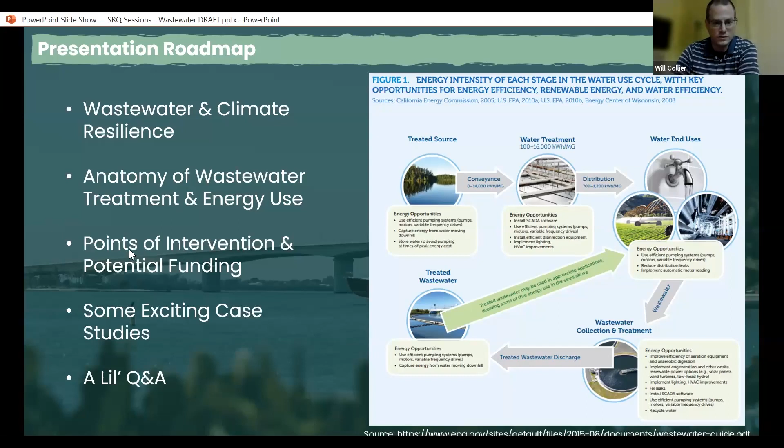more broadly, especially in the Gulf Coast region of Florida, where the intersection of the coast, seawater infiltration and wastewater treatment facilities and extreme weather events all come together and coalesce in ways that are extremely important for climate resiliency in communities. Let's start with the big picture.

So wastewater energy use, very broadly speaking, consumes a lot of energy. At a national level, it's approximately 3 to 4% of all electricity use in the United States. And at a municipal level, that can range anywhere from 10 to 40%, depending on the characteristics of a given municipality, the wastewater treatment plants, et cetera. So considerable energy use goes into treating water.

It's an area where municipalities have significant opportunity to reduce energy costs and energy burdens, perhaps making it a different term than we use in the residential setting, but thinking about the ways that energy costs and energy efficiency can help wastewater treatment plants to reduce overall costs for municipalities and make them more resilient in the process. So there's a lot of both direct and indirect benefits that would come from doing so, as we see here in a recent EPA report talking about energy efficiency and wastewater treatment.

I won't list them all here, as you can see, but economic development tied to workforce development that can go into training needed for new equipment, new infrastructure, new operation and processes of wastewater treatment plants, I think is a big and important part of this.

As we've talked about previously, and as we see with a lot of federal funding coming down, both through the Inflation Reduction Act and the Infrastructure Investment and Jobs Act, we see opportunities to add workforce development and training as a component to many of the sector-specific grants that are coming out of the federal government to ensure that those monies can actually be implemented by having the workforce available to do so. In addition, lots of other benefits, of course, reduction of greenhouse gas emissions, public health amongst them.

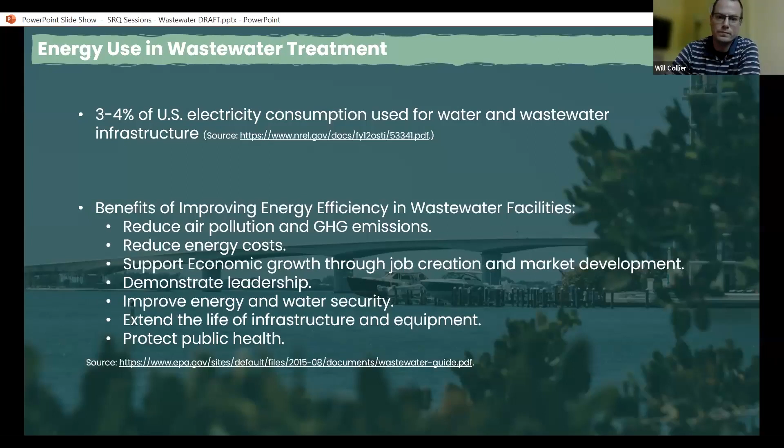Since I've been spending a lot of time recently working with coalitions and networks that talk about the sustainable development goals and try to think about a common language through which we can discuss and talk about local climate resiliency, I've put in here the United Nations Sustainable Development Goals that I think most directly relate to some of the things we're talking about today, this intersection of wastewater, energy, and infrastructure development.

There's at least 6 sustainable development goals that are entangled in these processes, be they focusing on upgrading industry and infrastructure in communities and cities for climate resilience, be it related to efficiency in water and energy use for clean water and sanitation, and the impacts that has on overall energy use of a given municipality or state or country. Then, of course, the economic opportunities that go along with that. So excited to think about this in terms of that framework and what projects and sources of funding might hit different pieces of these goals, but also collectively, sort of integratively address quite a few of them.

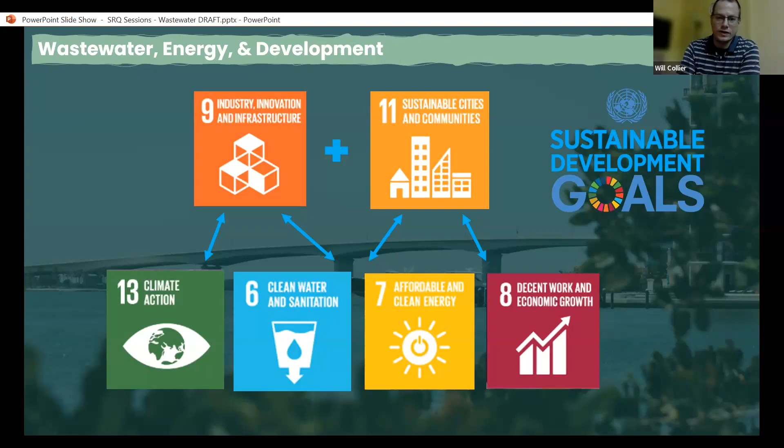To provide a little bit of wastewater context here, especially in the state of Florida, I just wanted to point out a few things, neat little GIF here of some recent wastewater spill hotspots that have happened. And you can obviously see the Gulf Coast has been seeing considerable wastewater spills along Florida and will continue to do so, especially if you look at the 2 graphs on the right. You can see impacted Florida waterways by wastewater spills. On the bottom right, you see projected population growth for the top 20 Florida counties.

And you can see that there's not a single one of those counties that is expected to have a reduction in population growth. And so energy use in the wastewater sector is anticipated to increase some 20% with these changes to population growth, with increased water demand, and with increased needs for water quality. So this is an opportune moment to potentially take available federal climate funding and other sources of funding focused on climate and energy, apply them to the sector that can have huge payoffs, especially for municipal administrations.

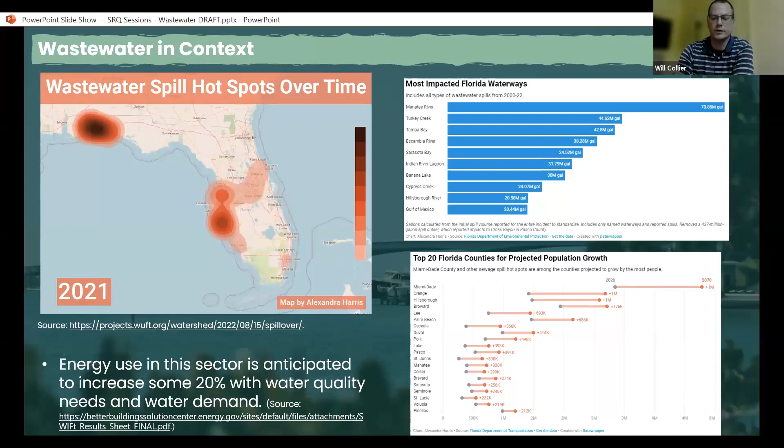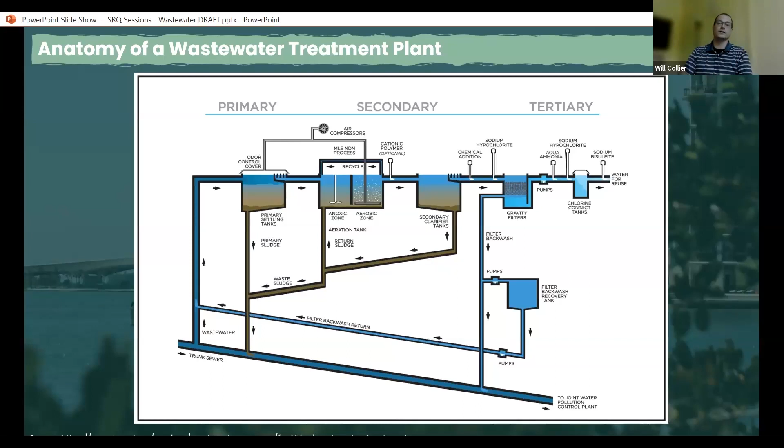So next, let's dive into the anatomy of a wastewater treatment facility to better understand where energy use occurs along these processes, where there might be important points of intervention, where we might match funding to those bottlenecks or points of intervention. This is a really great graphic we were able to take from Los Angeles County's wastewater treatment division, and it does a great job of sort of, in general terms, summarizing the different components of a wastewater treatment facility. What you really need to take away are these 3 primary areas or components of this process where different operations occur and different energy uses associated with these processes.

So you can broadly think of them, for those of you that don't have a ton of exposure to wastewater treatment. This website does an excellent job of trying to relate the processes that you see along this chain within a wastewater treatment facility to the natural processes that they are in some way, shape, or form trying to mimic in order to treat wastewater. So at the beginning of these systems, in the primary treatment phase, you have these really long concrete channels and holding tanks, places where solid materials can precipitate out.

In the secondary treatment phase, you have these aeration tanks where they're churning them. What's the word I'm looking for? Putting bubbles into them, creating aerations to promote environments for bacterial growth and for the breakdown of biosolids. And then finally, there's a tertiary stage where you move into using either chemical or organic processes to deal with suspended materials still in the water. At this point, you can also use UV light or other chemicals as a way to treat the water as well. And so I'll let you read these in more detail after we share our presentation.

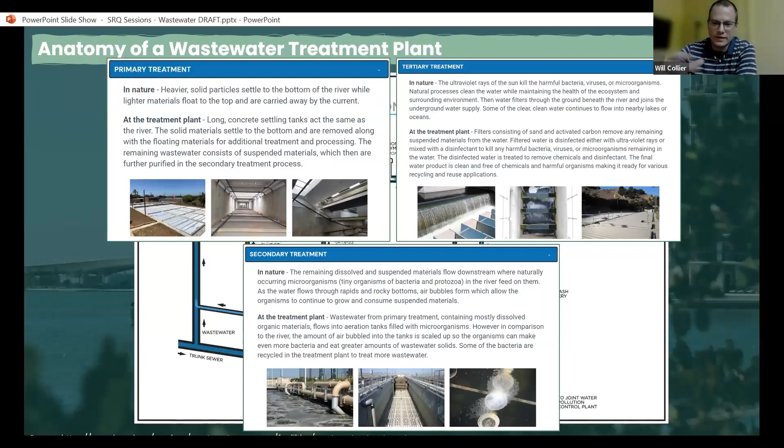So we'll let you explore that later, but it's neat to think about how wastewater treatment plants in very real ways are mimicking natural processes. Here's a big picture, bird's eye view of a wastewater treatment facility, just to give you an idea of some of the scale of these facilities and where these processes are playing out across a landscape. This is a really unique case study that we'll come back to in a little bit, but you can see that these primary, secondary, and tertiary processes are occurring across the footprint of this wastewater treatment facility that has implications for resiliency, for pollution, and for energy efficiency.

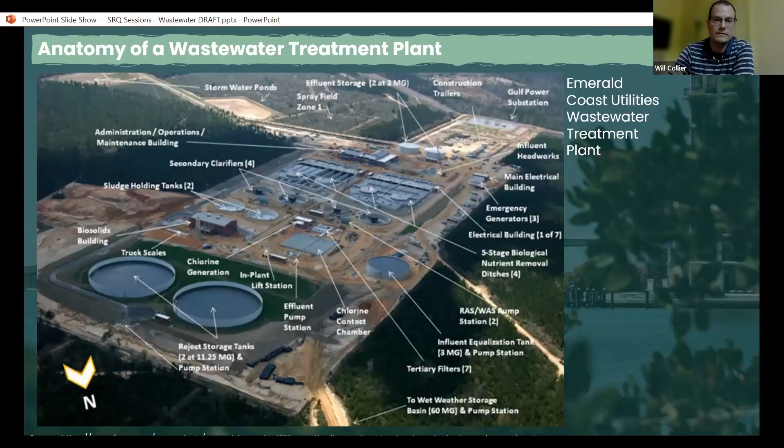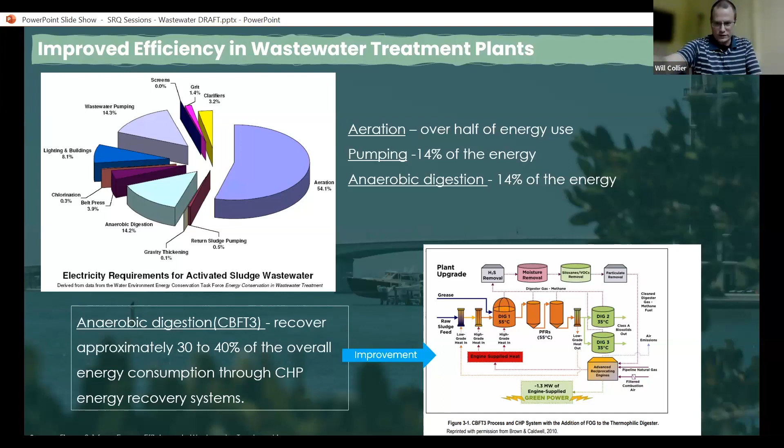So this example here on the bottom right, you can see this is a very specific type of anaerobic digester that is designed to recover energy through the anaerobic digestion process and use that energy in further wastewater treatment processes in order to reduce total energy loss and use.

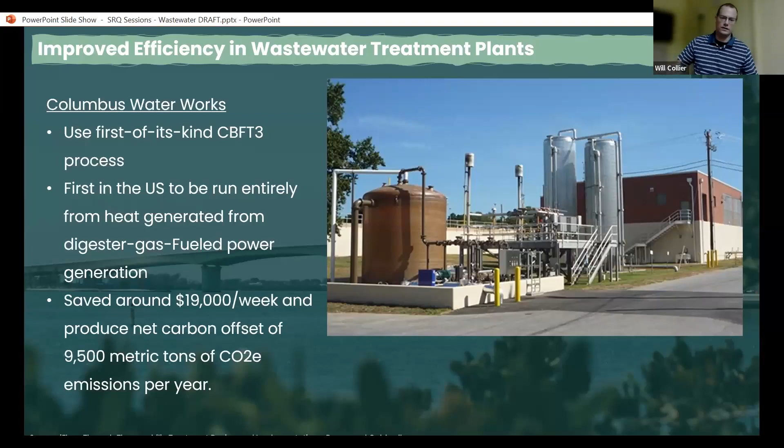And so in this Columbus Water Works example, they installed a first of its kind anaerobic digester to do this, and they were able to save around 19 grand a week and produce more than 9,500 metric tons of CO2 offsets per year.

One of the funding sources that we've seen across a variety of case studies in order to do any sort of upgrades to wastewater treatment facilities, be they retrofits, relocations, et cetera, has to deal with state revolving loan funds. And so IIJA is adding an additional 11.7 billion to state revolving loan funds.

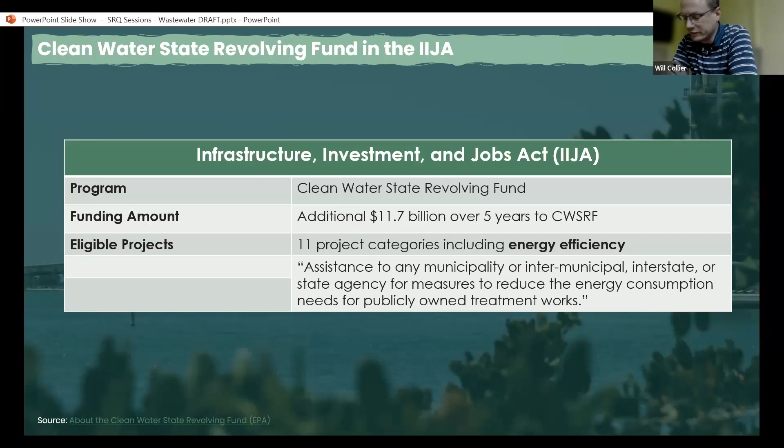And we'll see that these become a key piece of funding that, to use a popular term I've heard a lot with the IRA and IIJA, is you can braid funding from a variety of sources or stack funding together in order to make it go further, match different sources of funding. And so these clean water state revolving funds that have just been increased via IIJA will be really important parts of those processes.

Here's a really neat resource that I would definitely recommend folks check out, that they're doing some fabulous work and it's work in progress. So things are underway and it seems like a really exciting project. This is through the Department of Energy, Better Buildings, and it's a Sustainable Wastewater Infrastructure of the Future Accelerator Program, or SWIFT program. And it's engaged over 70 facilities, developed tools and resources for these facilities. You can find these online.

So if you go to the DOE SWIFT website, a plethora of information is available for municipalities or private wastewater treatment facility operators, from energy data management and analysis, monitoring, measurement, evaluation, financing options, et cetera. This SWIFT toolkit that they're continuing to build and are doing so through these pilot engagements has been especially successful and a spectacular resource. And they plan to continue to broaden these tools. It's, I believe, a multi-phase project beyond just these two phases.

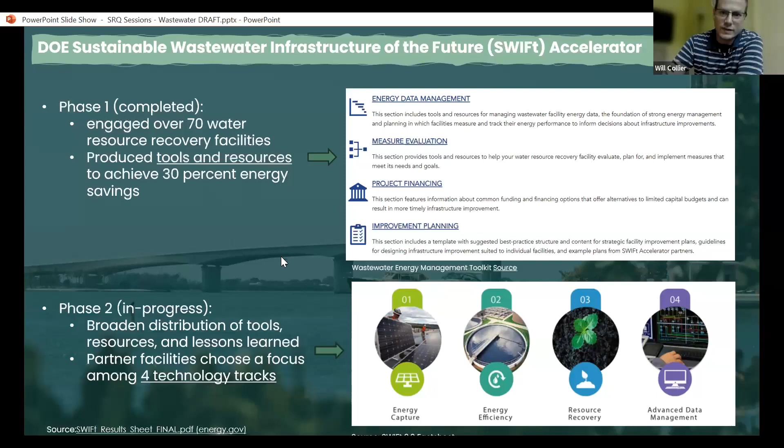And so now they're expanding to different aspects or different angles at which one can think about climate resiliency in wastewater treatment, be it energy capture, efficiency, resource recovery, et cetera. So highly recommend you all checking out these resources whenever we share our presentation.

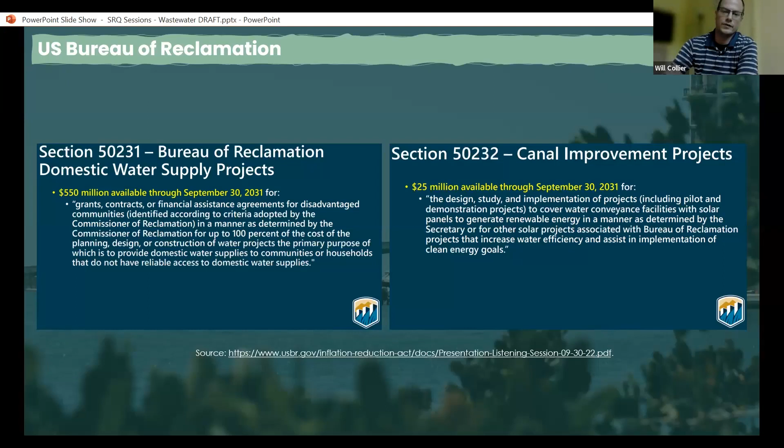Another piece of funding that we've seen in a few places that has been braided in some really unique ways across case studies is looking at reclamation or improvement funding for waterways. This usually will sit outside of wastewater treatment facilities or be used for things certainly beyond wastewater and wastewater treatment. But we've seen some examples where there's been some really unique braiding of funding across different sources of water funding that municipalities or other applicants have been able to successfully put together.

So let's look at some examples that we think are kind of unique and might provide insights to wastewater treatment opportunities and climate resilience opportunities on the Gulf Coast of Florida, especially. So here's one from Crested Butte, Colorado. This is just a great case study example that we have the link to through NREL

that provides a very clear energy budget and that data management piece of how do we figure out where along these chains of wastewater treatment, for a specific facility and the specifics of that plant and that location, to quantify the energy use, and then for the administrators to be able to make informed choices about those potential bottlenecks based on their resources and funding.

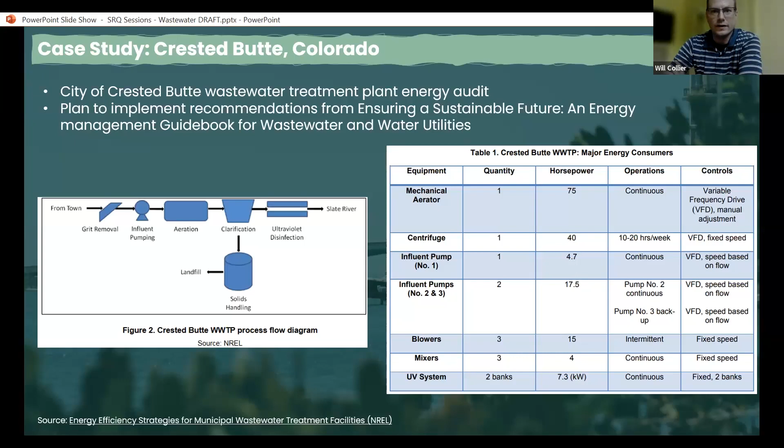So Crested Butte was able to work and produce a really robust inventory energy audit of their facility that I think is critical to all of these case studies and to implementing these funding opportunities in a variety of ways.

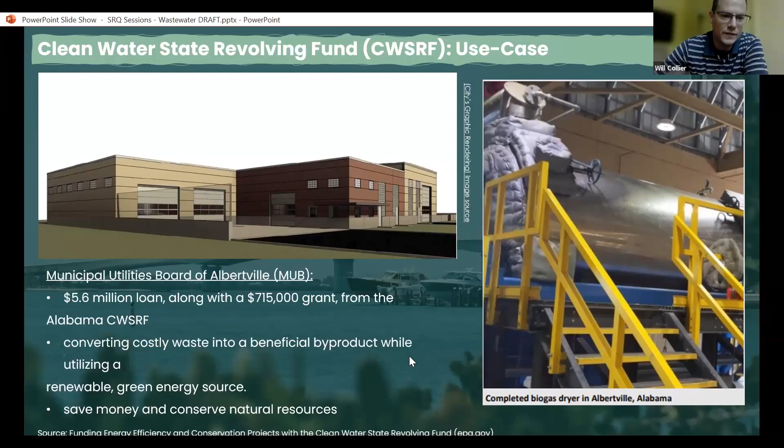The next case study we looked at very briefly here is in Albertville, Alabama. And they used a combination of a loan and a grant to install this biogas dryer unique to their facility, which has allowed them to save money and use renewable energy in order to reduce energy costs in this facility.

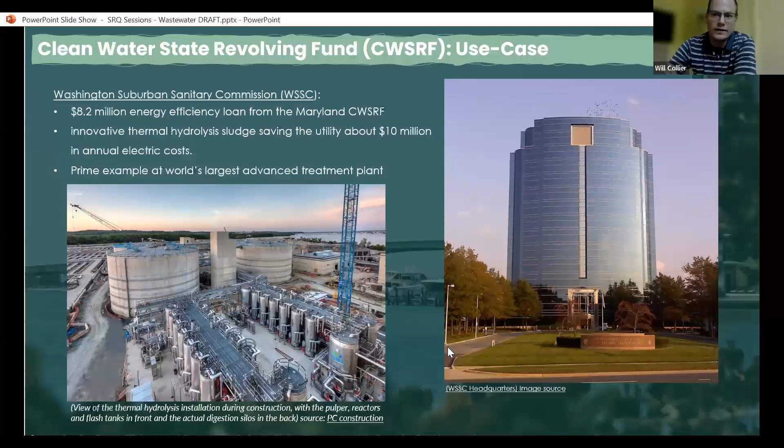Another really interesting example we've come across is right outside of Washington, D.C. And here the Washington Suburban Sanitary Commission used an $8.2 million energy efficiency loan to innovate their thermal hydrolysis equipment and infrastructure. And so here we can see that infrastructure installed, the largest advanced treatment plant in the world. And here's the headquarters for the Washington Suburban Commission.

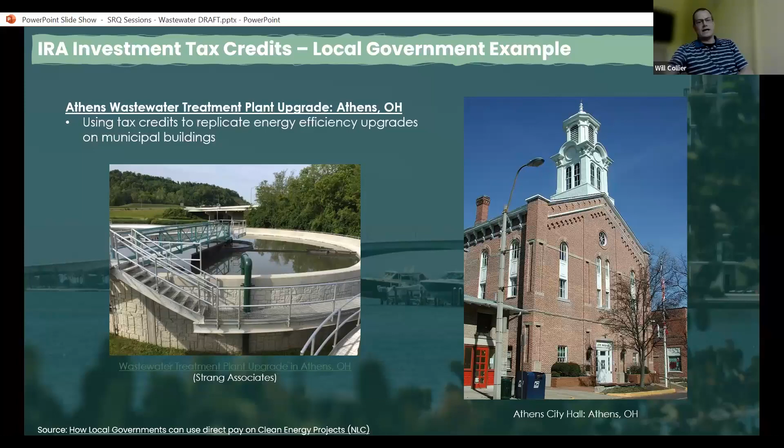So Athens Wastewater Treatment Facility used tax credits in order to upgrade their wastewater treatment facility, and this is an example of a smaller project, a smaller local government using direct pay tax credits in order to do retrofits and improve their wastewater treatment facility.

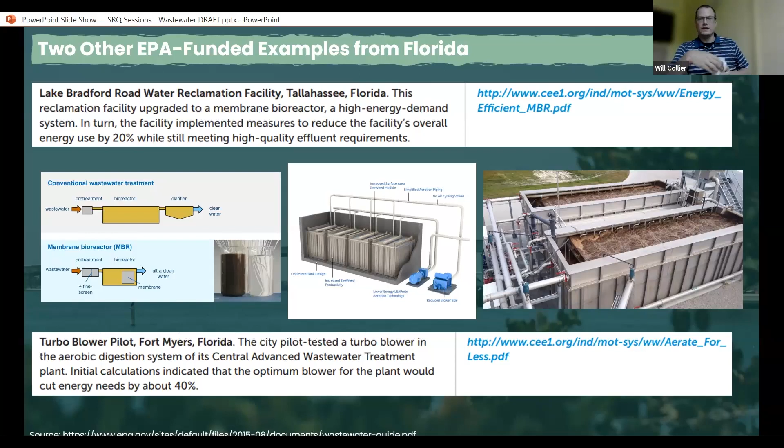Another example of a turbo blower pilot down in Fort Myers. The city tested a pilot project to increase the efficiency of the aerobic digestion system to cut energy by about 40%. So we've got the links here and some other sites and papers you can follow on these as sort of ongoing projects. A unique project those of you in Florida might be familiar with was the Emerald Coast Utilities

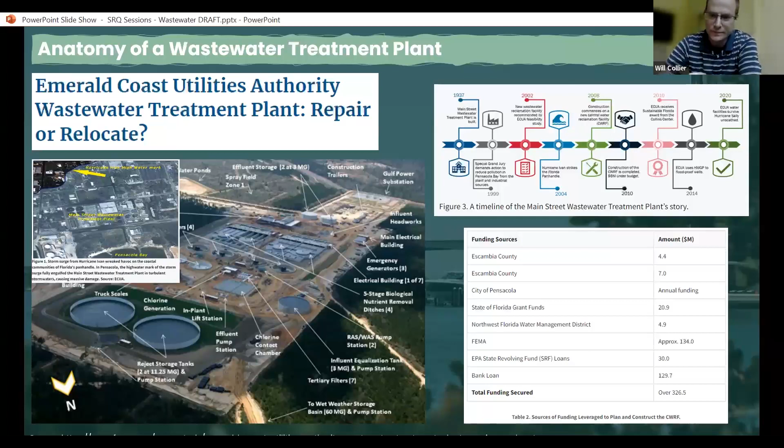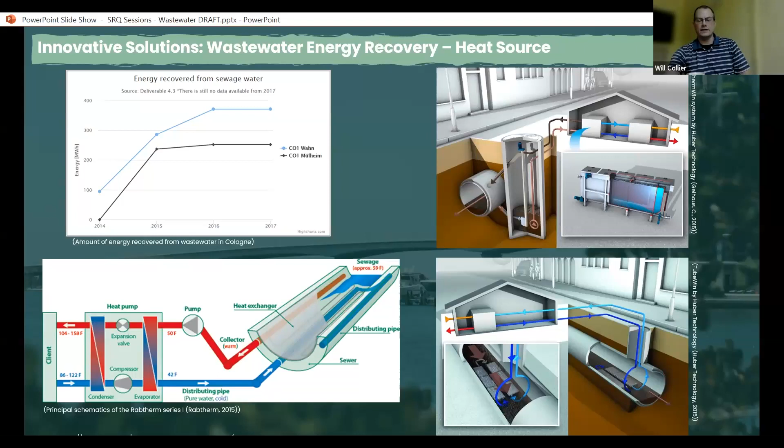This example here is an innovative example coming from the academic literature about the potential to capture thermal energy and energy coming through wastewater treatment systems, be it through biosolids or through different processes in wastewater treatment, capturing that energy and using it to reduce the total energy use within the system. There's some really exciting work going on there. We have some links to some academic literature we can include and be happy to share with you, especially around the use of heat pumps in order to capture excess energy coming off of wastewater treatment facility infrastructure.